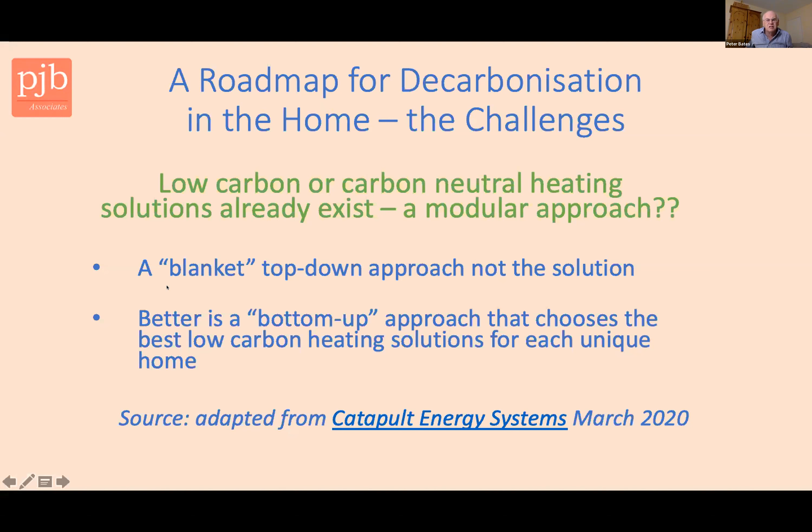Peter Bonfield, who was the CEO of the Building Research Establishment, said that in fact every home is unique, and that must be emphasised: there isn't necessarily one solution for every home.

Another thing to consider, at least what the Catapult Energy Systems considered in March 2020, is that 2/3 of homes are still suffering from damp, draught and overheating, and they are wasting energy. And something like half the population, and probably still not far off that, I would suspect, have no awareness of low carbon heating, or how to actually make homes carbon neutral.

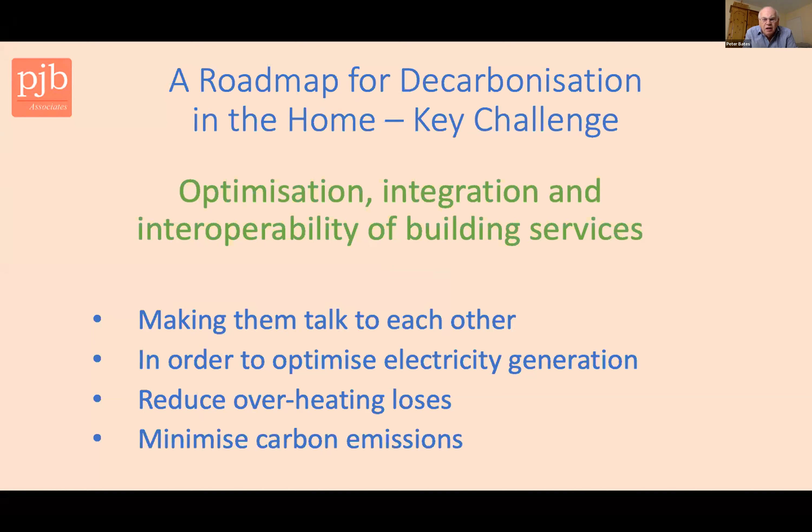So one of the key challenges, as I want to talk about today, is all about optimization, integration and interoperability of building services. Now, what I mean by building services is basically the boiler in the home, immersion heaters in the home, and anything that actually provides heat and hot water can be called services.

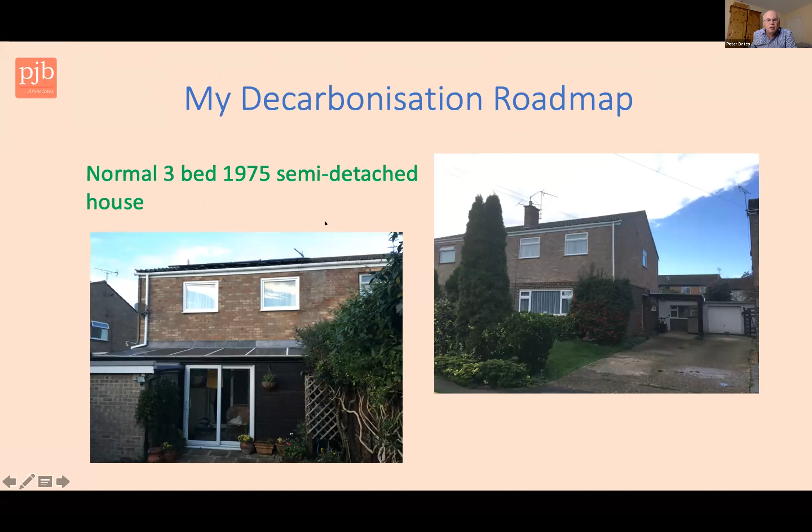So if we look at my own house and what is my decarbonisation roadmap: normal 3-bedroom, semi-detached house, built 1975. I've been in it for over 25 years. I've done probably as much as I can do in terms of taking the fabric first approach, in terms of loft insulation and cavity wall insulation. What I really need now, but it's not the purpose of today's event, is some nanotechnology which I can spray across my cavity wall, which will provide the perfect insulation. So I've done as much as I can anyway, although I'm still looking out for that as an innovative solution to emerge at some stage in the next few years.

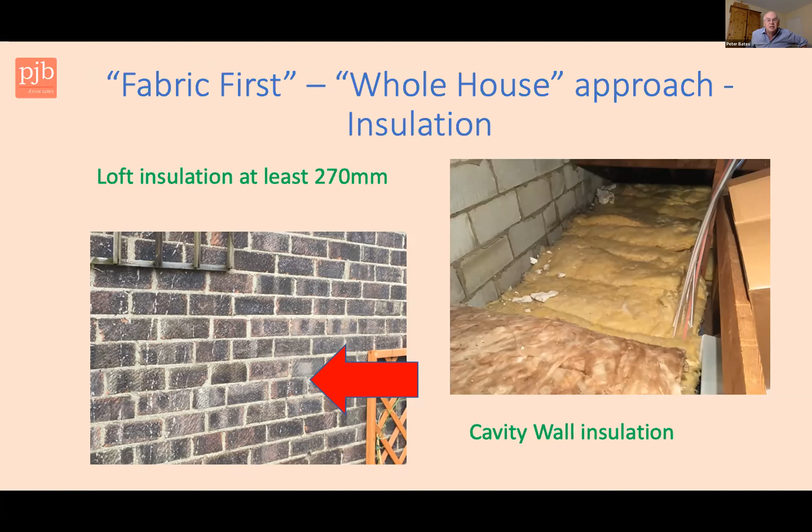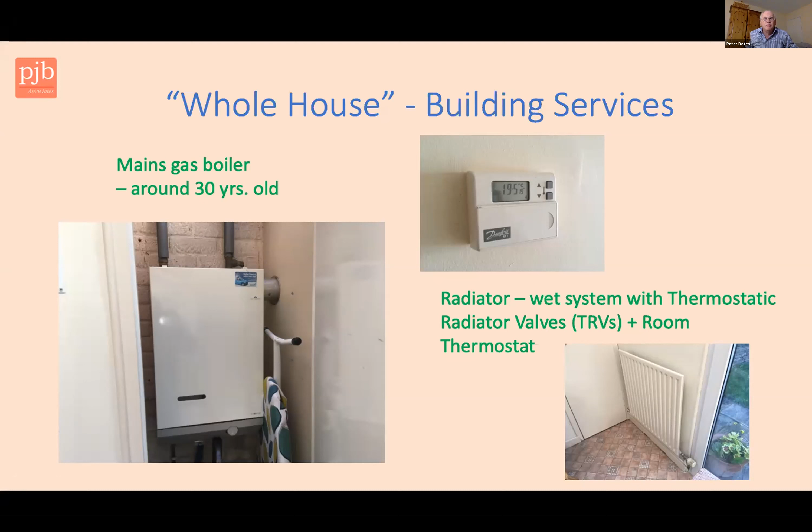What I had until recently was a 30-year-old mains gas boiler with the traditional thermostat and normal radiators. And I've gradually over the years been decarbonising my home, as you'll see. About 20 years ago, I installed solar thermal. I'll be honest, it wasn't a strategic plan 20 years ago. I probably got conned by the equivalent of the double glazing salesperson, and was encouraged to buy solar thermal.

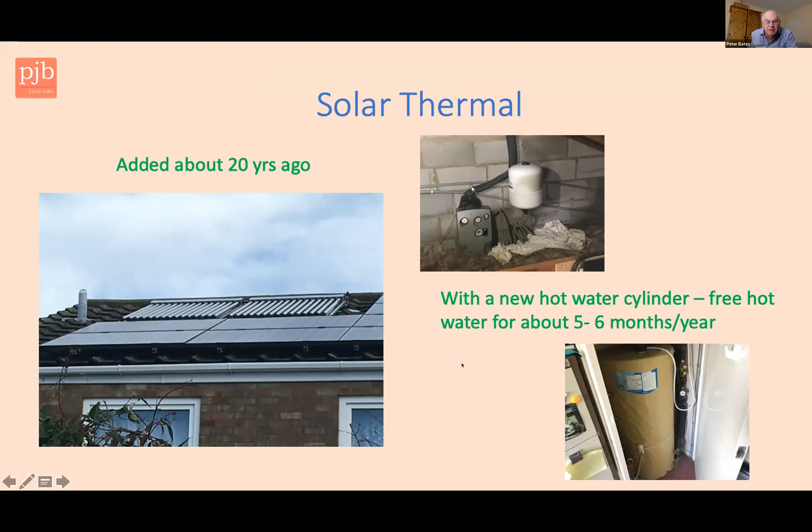Having said that, it actually provides me with basically free hot water for 5 to 6 months of the year. The expansion tank has been replaced, there's been a couple of services to it, but it's still going. And I've got probably 70, 80 degrees of hot water sitting in my tank, which I can't use because it's too much for me. I keep wanting to send it to my neighbour.

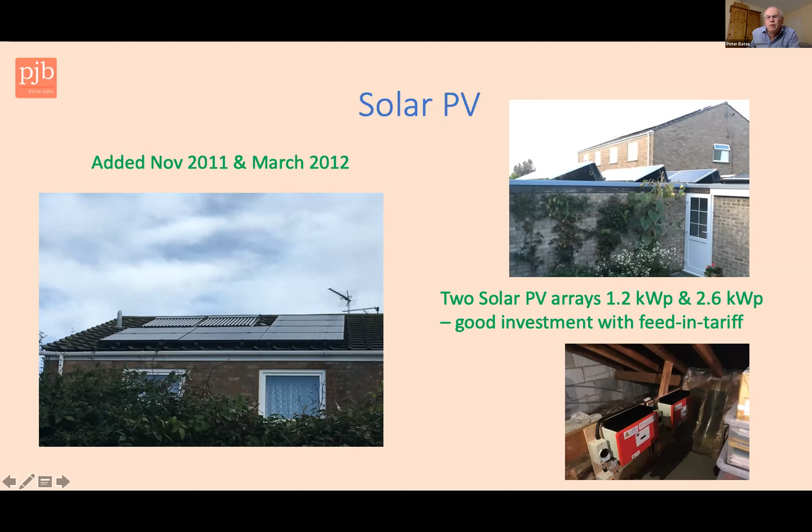In 2011, 2012, I took advantage of the feed-in tariff for solar PV, so installed that on the roof of my house and also on the flat roof of my garage as well. I was very aware that there is a potential for battery storage. So in 2019, I forked out just under £10,000 to put in a 15 kilowatt battery storage system.

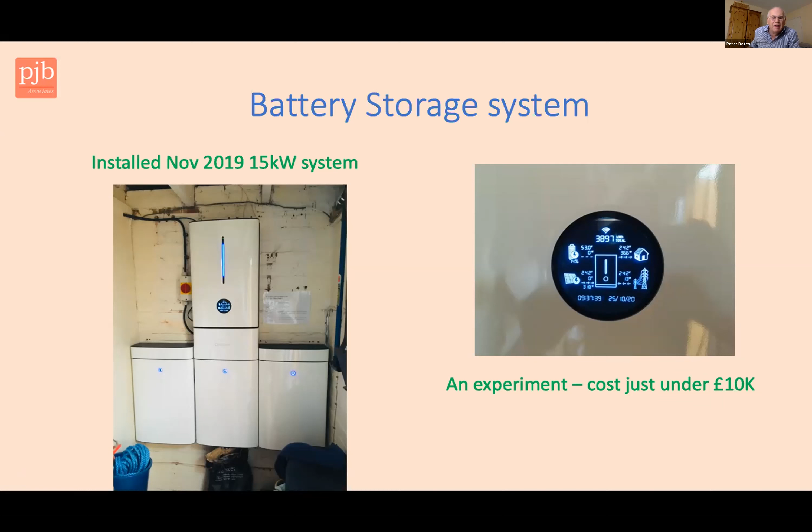It is an experiment. I wouldn't expect most people to put that in their own homes, but I thought I'd try it out and see what I could do with it, because I was particularly aware of tariffs like Octopus Energy's tariff, where there was the ability to buy electricity when it was cheap and then sell it back to the grid when it was expensive.

I remained until July last year on the Agile tariff that some of you would know about, but then, due to the costs of electricity, as most of us know, I've now gone back to the equivalent of an Economy 7, but in my case, my off-peak is between 8:30 and 1:30 in the evening and very early morning.

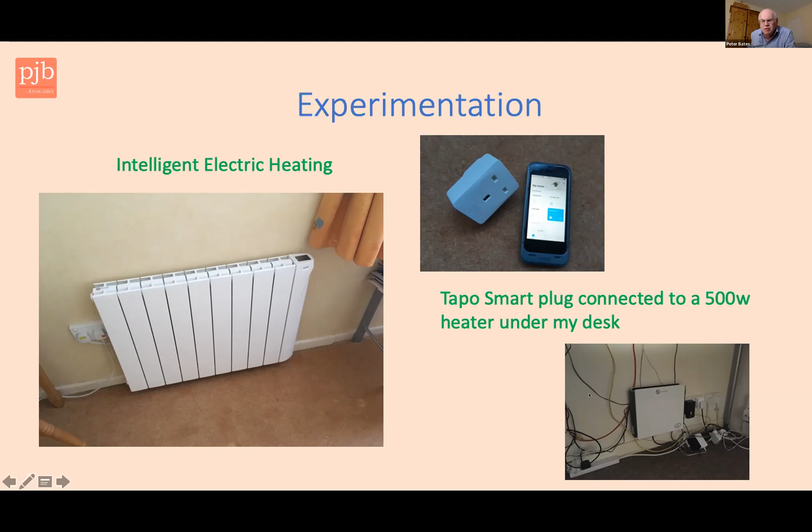I then experimented with intelligent electric heating. I also experimented with these smart plugs and found a nice, neat solution under my garage office where I could put a 500-watt heater and then set a timer using the Tapo smart plug. Most of those otherwise, by the way, just have to do with computers and printers.

I then heard about the PowerShaper project, which you're going to hear more about later this afternoon from the Carbon Co-op based in Manchester. And I said I wanted to have an electric charging point, so I decided to buy an electric car to make that possible. But to be fair, it was a 13-year-old ICE car, that's internal combustion engine car, and it was about to be renewed. So I chose the time, probably got it nicely right, to buy an electric vehicle.

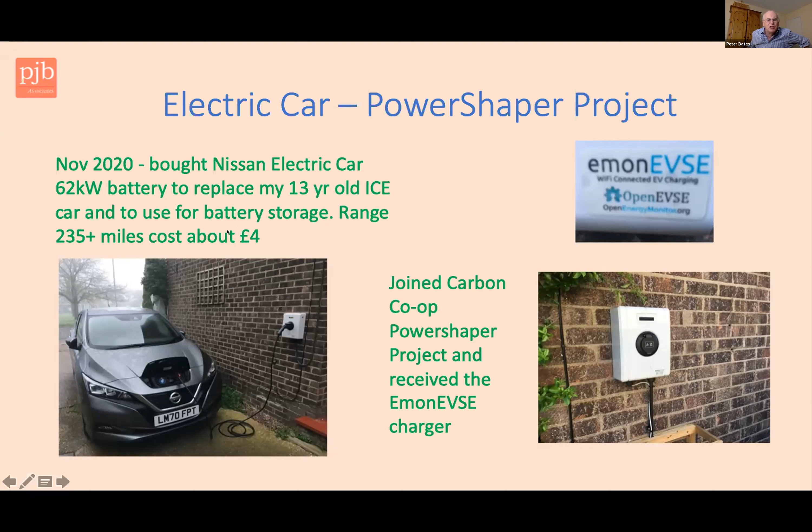Comparing the cost of an electric vehicle to an ICE vehicle - when we're talking about quotes of £100 to fill up the tank, well I get something like 235 plus miles on that mileage, and that actually costs me about £4.

But then I had the opportunity to get a Wallbox Quasar. It was given to me by Wallbox as part of a beta field testing trial, which I could use my Nissan Leaf for. So I've got the ability with this charger - it's bi-directional. I can charge back to the home, I can charge back to the grid, as well as charging from the grid back to the car.

That is probably fairly unique. It was probably 2 or 3 years away that this type of technology would start to take off. And it won't use the system of CHAdeMO, which is one method of charging a car - it will use the CCS method. I can't remember what the acronym is for CCS, but I'm sure somebody will come back to me on that one.

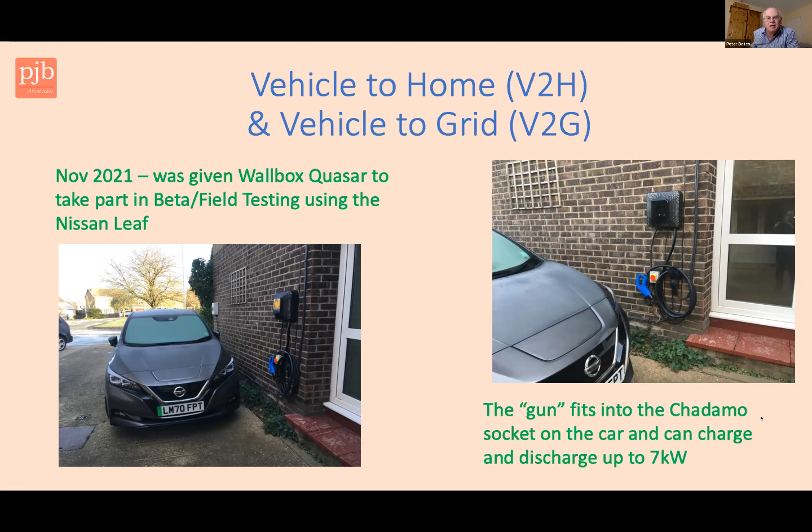Then in January this year I had the opportunity to take part in the Energy Systems Catapult, a government-funded organisation, and take part in their Living Lab. I had the opportunity to get some smart TRVs, which are the thermostats that sit on radiators. Normally you can only manually control these, but these all work automatically with an app.

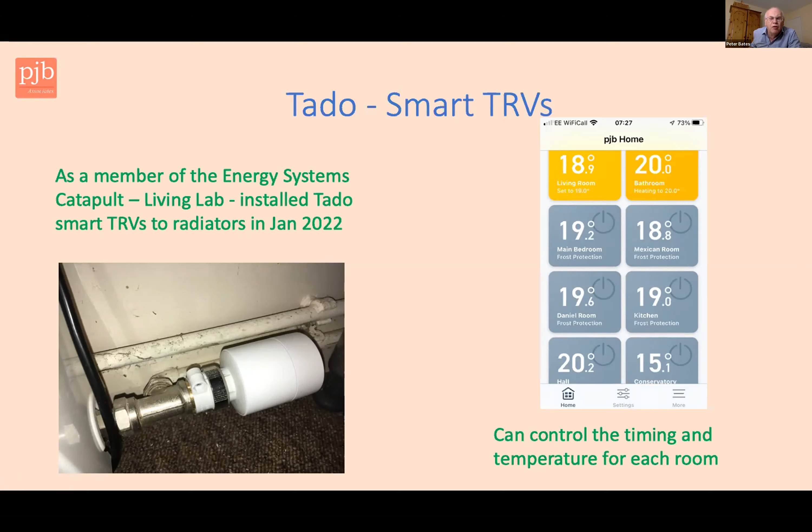So I'm moving a bit further along, getting much more control over my own heating system. I also took the opportunity in April this year to add a third solar PV array, because I discovered that the inverter on this battery storage system is actually a hybrid inverter, and I have the ability to transfer the electricity generated via DC, direct current, into the battery. The way it was originally set up on my other two solar PV arrays was by what I believe is known as AC coupling.

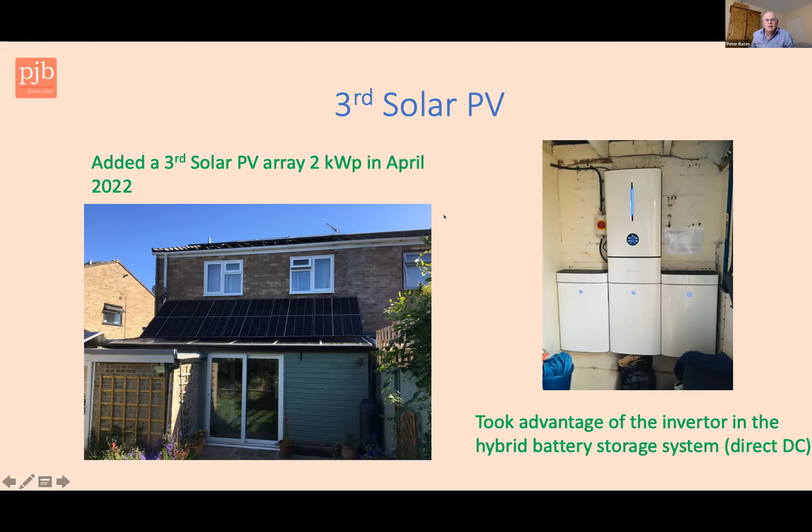And again, I finally managed in April this year to remove my 30-year-old boiler, which was sitting here, and I've decided to replace it with an electric storage boiler, which unfortunately, because it was installed at the end of the heating season, I've not been able to fully test it out yet. But I was able to get off gas, get the gas meter removed and capped, and only utilise, well hopefully only utilise, off-peak electricity to do this.

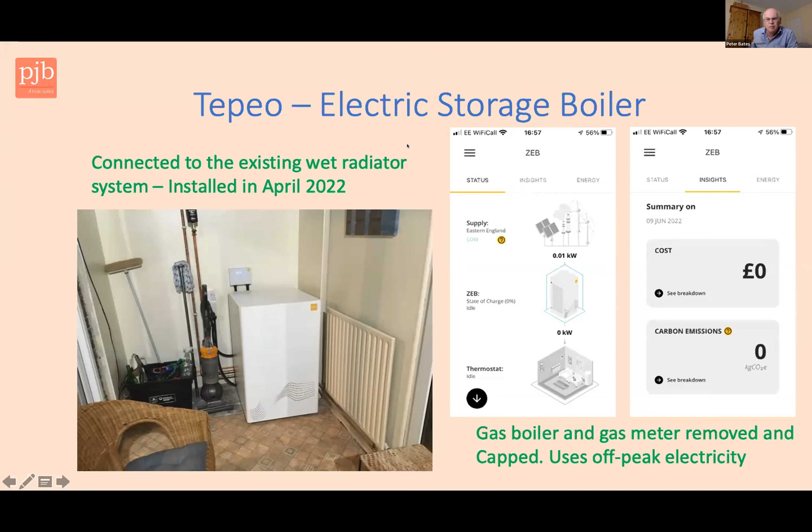So I've got to the point where I've now decarbonised my home. If you think of just removing all the devices, it's all about decarbonising the home.

My next stage, and this is the whole purpose of today's event, is to look at how I can optimise it, integrate it, and also make them interoperable - those various building services which I have - in order so that they will talk together. I'll be able to optimise electricity generation, reduce overheating loss, and minimise my carbon emissions.

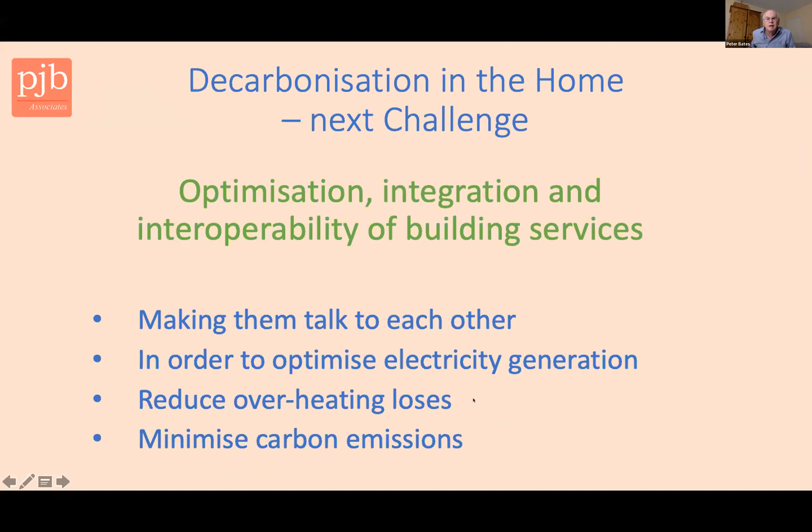So what do I need? Well, this is what I need. One problem I've actually got currently, or at least did until recently, is that the metering system for my solar PV and my battery storage system was only capable of dealing with the first two solar PV arrays. I had to have those disconnected, and then when I had the new solar PV array installed, it wasn't telling me my overall export from there.

But we recently solved that one with an open source solution with the help of Matt, who's our last speaker today. But there are all sorts of other issues which emerge there. So although I'm an early adopter, I think we're now getting to the stage where we need to look at some of these issues of how to make them work together. Quite often early adopters would buy a bit of this and a bit of that. Now I fully admit that most people, when they finally get to the point of decarbonising their own home and possibly removing their oil or mains gas boiler, there'll be much more integrated systems available for people at that time. But we're not there yet, and that's what I want to be talking about today.

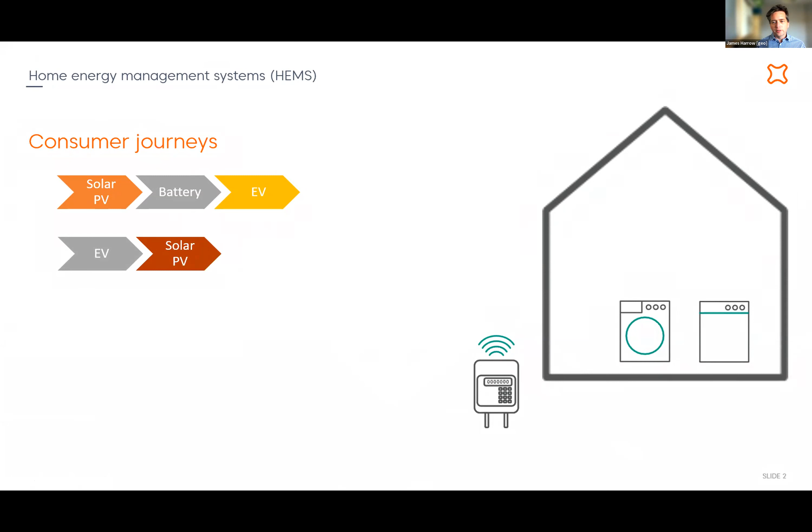That's because at GEO I was leading the core for grid demand side response and home energy management systems. I was lucky enough to be able to integrate our solution together with my own battery, a different one from the one we used on our trial. I'm going to talk to you today about when you really need a home energy management system and why you should have one.

At the moment, if you've got solar and battery, those two things can work pretty well standalone. Battery inverters are designed to have a current transformer that detects how much export you'd be sending to the grid. It just clips around your mains connection into your home, and that automatically charges. When the sun goes down, it will automatically discharge to power your appliances.

But if you've also got an EV, solar and EV chargers do exist today and they work pretty well. It's a similar setup where the EV charger stops you consuming power from the grid and only consumes from your solar panels. As you start to add more on this decarbonisation journey, my next purchase is likely to be a heat pump.

So I'm going to struggle to work out how to control all of those things and reduce my import from the grid, and also make sure my washing machine and other white goods appliances can be controlled in a similar way. It's really important to talk about early adopters and mass market, because there are systems out there today, and as Peter mentioned, he's starting to find the bits of kit don't work together. They were never designed to work together, and that's what we need to address for the mass market.

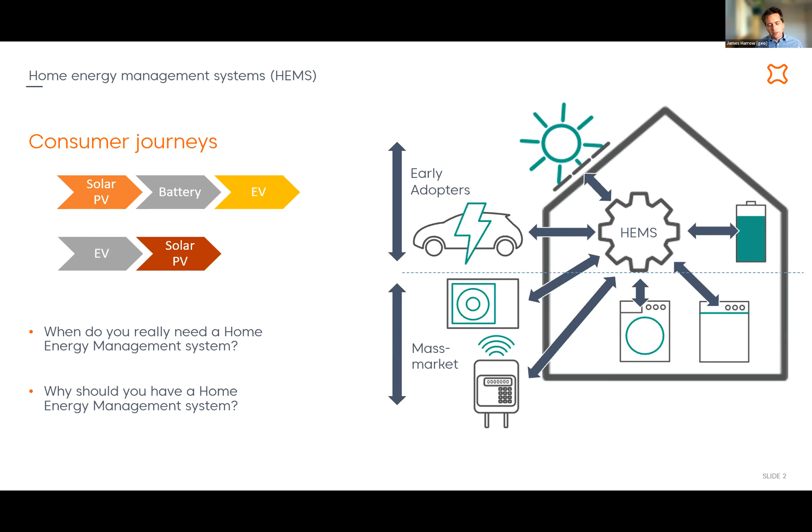So let's talk about the optimizations you'd want from a home energy management system. The dream is that you as a consumer don't have to do anything - you just set the system up and it does everything for you. On our corporate grid trial, we built a solution that would do exactly that.

For example, you want to look at the cheapest times of day, so knowing when the tariffs are going to be cheaper, but also taking into account things like the grid carbon intensity - the more power stations we need that are burning fossil fuels to power the grid, the more CO2 is produced by the population across the whole country.

If you're lucky enough to have solar PV, you've probably got a different optimization. You want to decide where your solar goes - do I put it into my battery, my heat pump, or my EV? Maybe you can do some of them simultaneously. It's really when you get more than two or three energy smart appliances that you need something to take care of that for you.

And I certainly today manually have to work out when to put my EV on charging. I have to go down to the EV and reduce the charging rate, because my particular EV charging system doesn't yet have the capability to limit the charge rate for the amount of export.

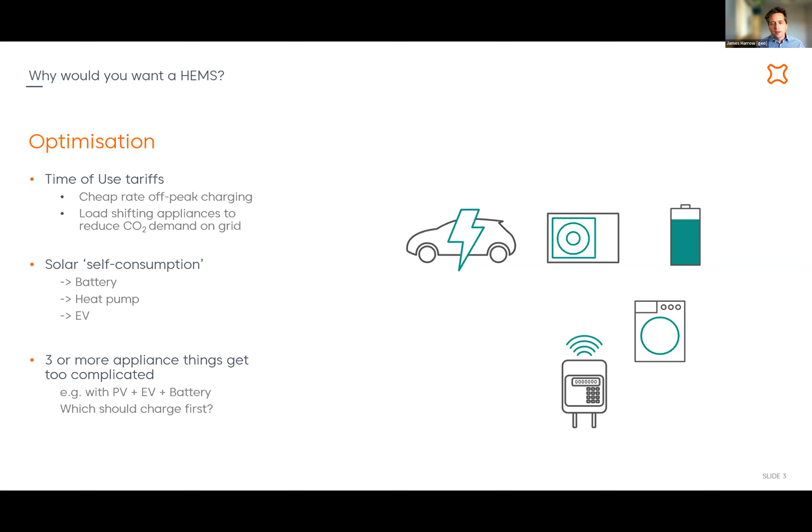So there are challenges. If you've got solar, that's great - you can work out where you put the energy during the day. Once the sun goes down, you probably want to make sure you're powering things in the home, and you may pull some power off the grid. But at night you probably want to charge your EV. There's a general principle here: we try not to first charge one battery and then discharge it into another battery, because you lose about 20% efficiency in the round trip of going in and out of the battery.

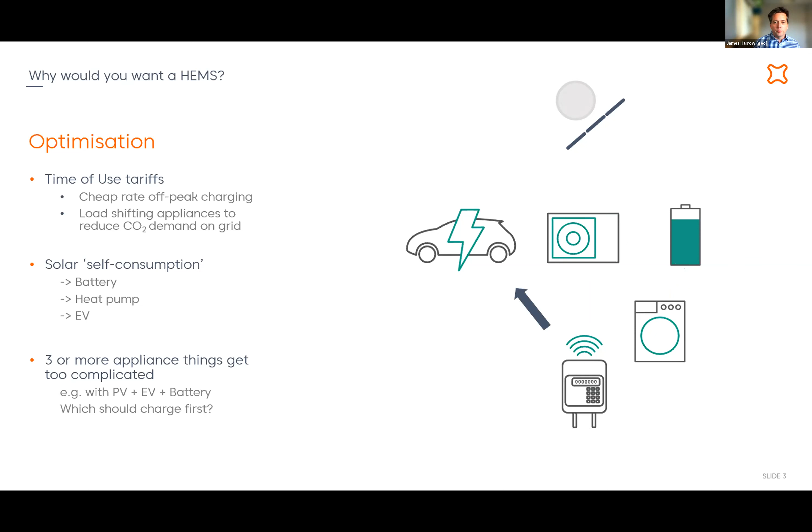So it's always better to charge your EV directly off the mains if you can, rather than taking the power out of your home battery.

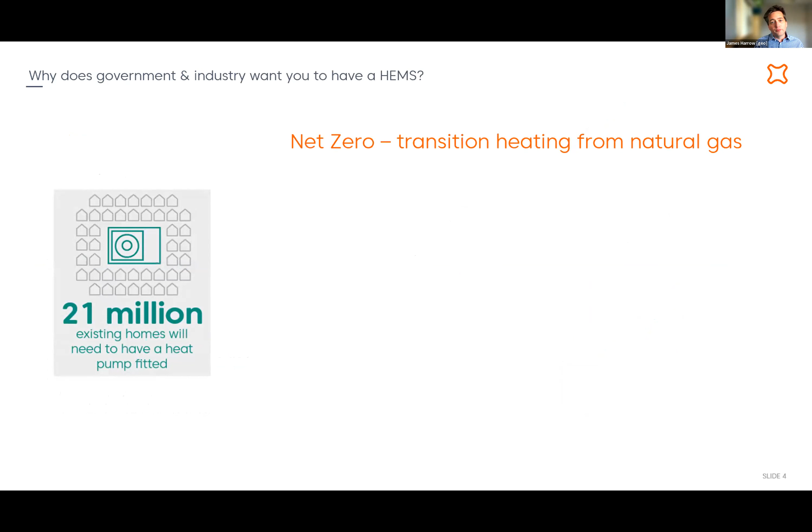But there's another reason you really need to look at why government wants you to have an energy management system. In last year's Climate Change Committee budget, they said that out of the 27-28 million homes in the UK today, by 2050, 21 million of those will need to have a heat pump fitted. The government has already started announcing plans to get us to 600,000 heat pumps installed every year by 2028.

We've done a white paper with Valent on heat pumps and the impact on the low voltage network. So what do we mean by low voltage? We mean the 230 volts that feed your house. There are transformers and substations you'll see around your houses, villages and towns, and cables that feed that electricity into your house.

We did some calculations which show that if somewhere between 10 and 20% of homes converted from gas to electric heating and cooking, as a consequence of getting rid of your gas meter, that's probably going to start causing issues on the local grid.

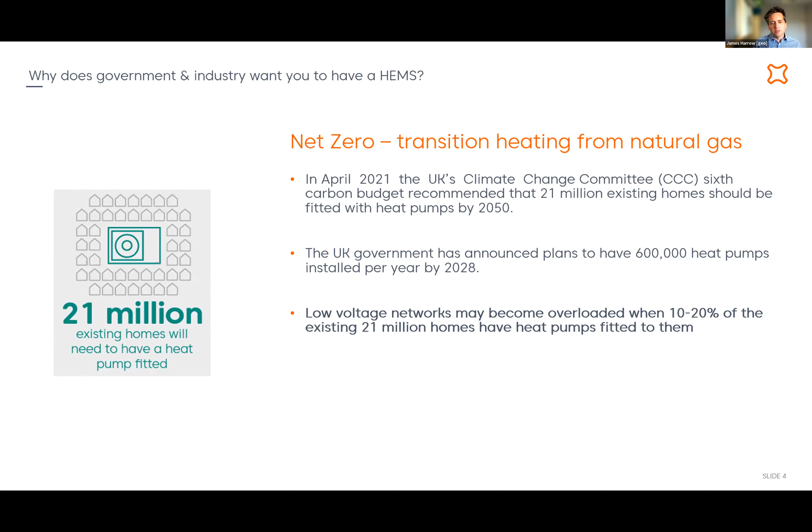So we need to be really careful about when we charge our vehicles and when we use heat pumps, in order to avoid power cuts and issues on the local grid.

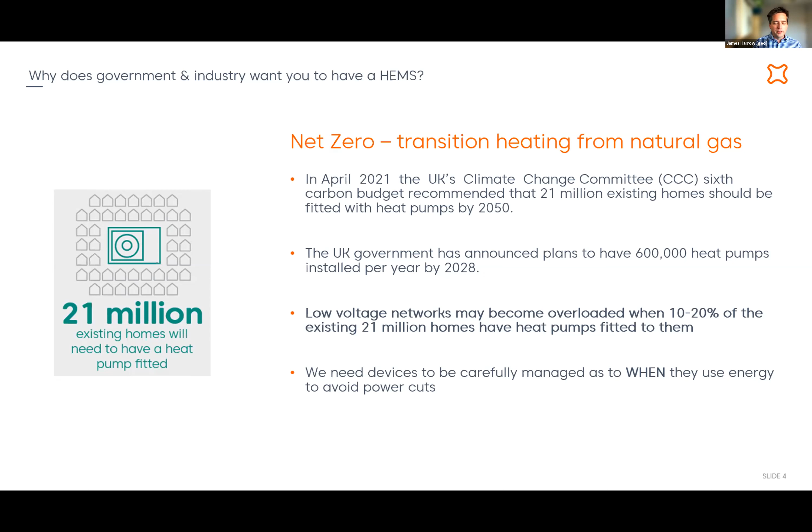So there's a whole technology sector growing called demand-side response, which is already there for industrial and commercial applications. We've looked at the modeling for the peak times of the day.

Between 4 till 8 p.m. is when everyone comes home, they start cooking, they put the lights on. You've probably still got some shops and offices open where they're also using power as well. So the peak on the grid is at that point.

Now with EV charging, if you get a new EV charger this year, it will actually by default not let you charge during those peak time periods, and it will encourage you to shift to overnight charging.

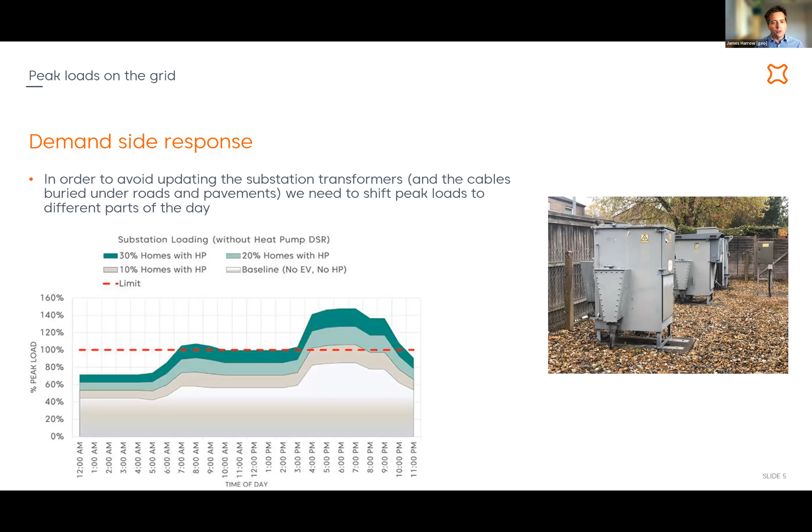But with heat pumps etc., we can't really turn off heat pumps during that time. So we need something to control the heat pumps and also the other white goods appliances in your home.

As it stands today, there are lots of existing and possibly open standards that are there. But the solutions you buy today, you may find that you actually get locked into a particular vendor or a particular group of companies where their equipment works together.

You can imagine if today you bought a Tesla Powerwall and a Tesla EV, you'll get a really good experience. But if you decide to move away from Tesla and buy a Jaguar I-Pace or some other EV, that wouldn't necessarily be compatible with the Tesla Powerwall, and you wouldn't get the same great experience.

There are lots of trial systems out there today, and Peter's talked about some of the ones he's already on. Geo's done a government-funded trial a couple of years ago on how to build a home energy management system, but it's not yet really a mass market.

As Peter mentioned, the CHAdeMO charging standard, which allows vehicle to grid, is not readily available in the newer European standard for CCS. And again, I can't remember what CCS stands for either.

But there are some standards coming along. There's a great one called EEBUS that's being adopted by German manufacturers. That is really a whole home energy management system, with lots of protocols that operate inside the house to do that sort of thing.

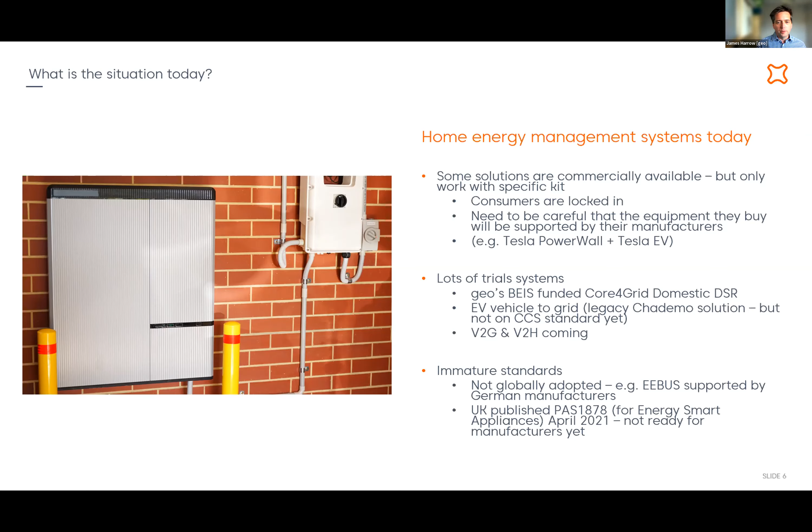So where are we now? I guess the key takeaway is we're not quite there yet, but there are really some compelling reasons for having a home energy management system. As Peter's already outlined, the early adopters want to optimize their PV generation, reduce their energy bills and reduce their CO2 impact.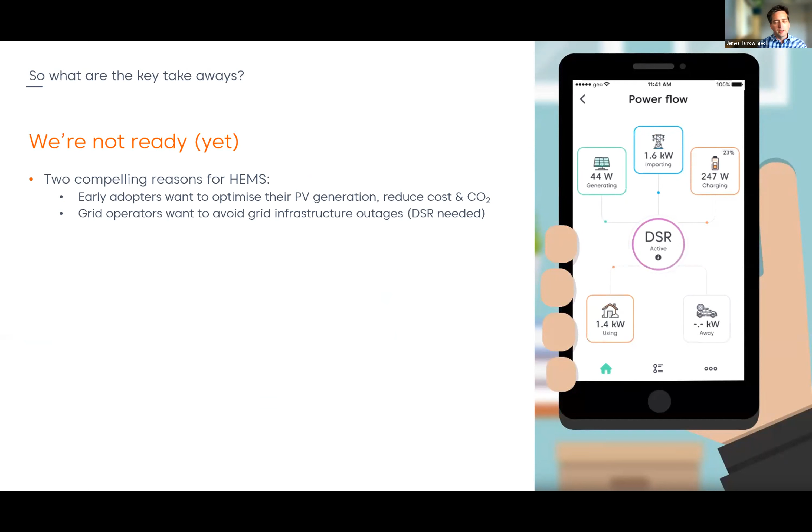And grid operators really want to avoid having to dig up the roads and replace all those substations around our homes. And also there's a national grid impact as well as that. So this is where we need the demand side response. We have not really got the interoperable HEMS and ESAs.

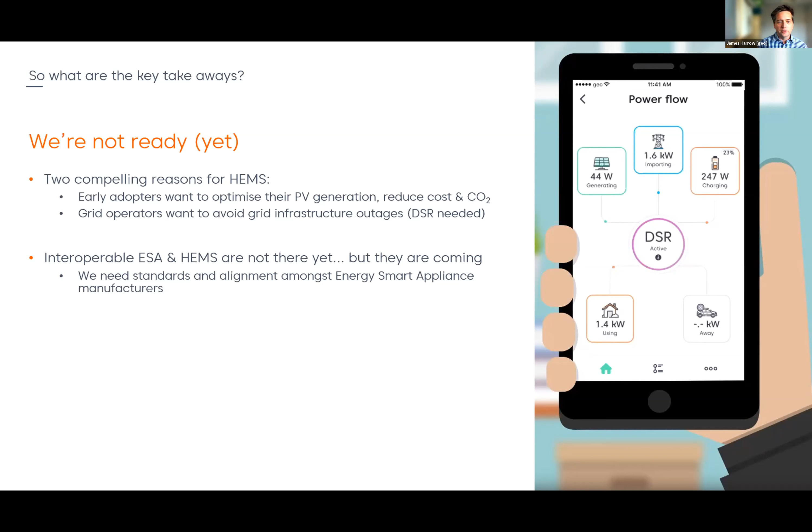So the HEMS being the home energy management system and the ESA being the energy smart appliances, but they are coming. But we do need standards and we need alignment amongst the manufacturers of those before the HEMS home energy management system vendors can actually build those products and make them mass market. So you can, as I say, get solutions today. You may not find a single vendor that supports all of your individual devices that you've got.

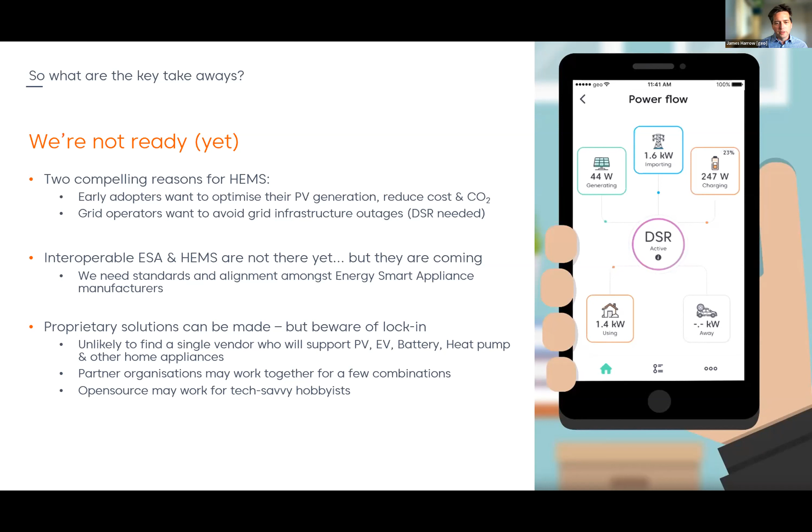You're more likely to have to work with open source, and actually if you're technical enough, you can probably build your own system together. But again, that's not really a mass market solution. Partner organizations may well work together. You might have a heat pump vendor working with an energy provider that controls your heat pump, but you might not find your energy provider works with your particular EV charger. So those partnership organizations need to be built as well.

But I think there is a very bright future, but again, it's all about putting the consumer first for mass market. So we need to look out for a new standard that's coming out this year. There is quite an exciting development going on. You may have heard about it, you may have read about it in the press, but there's something called Matter.

It is being developed by Amazon, Google, Samsung, and Apple as the four big digital giants that you'll probably have heard of, but there are hundreds of other companies involved in this, and that's across Asia, Europe, and the Americas as well. And we're expecting to see those first products launch this autumn. So that will have things like smart thermostats, smart light bulbs, media, hi-fi, automatic window blinds. All those sorts of products are part of that first tranche of delivery in this autumn.

But energy management is clearly on the roadmap, and there's lots of discussions going on. And we'd expect to see the first products maybe coming out next year on that. But I think going back to the government's desire to try and get to mass market, they need consumers to be able to adopt these products so that they can do that peak load control to avoid those overloads on the local grid.

And consumers need to have a trust mark, some sort of way of knowing that they can actually buy products that will work together. I keep talking about HD ready TVs 20 years ago, and I think it's probably time now we start having an industry consortium of something like DSR ready or Wi-Fi ready or USB, all those sorts of things that people as consumers can buy into and know about.

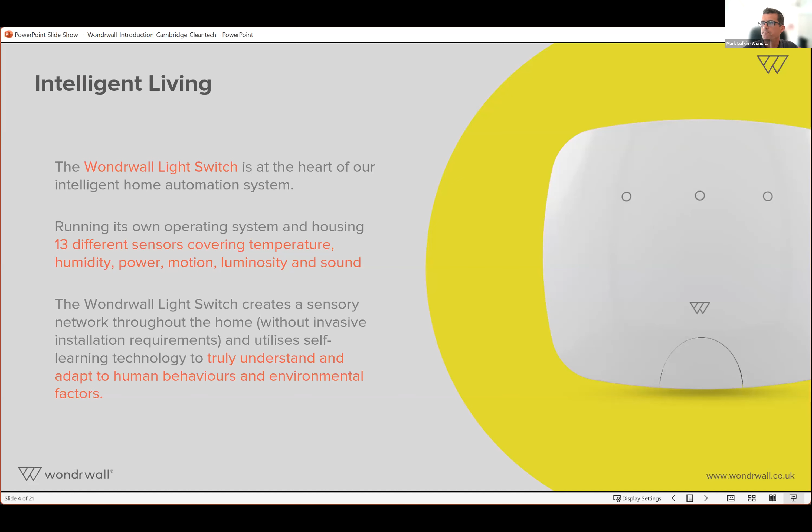So to give you a better idea of that, one of our homes will gather roughly 20,000 data points per day per home. So that's about 6 to 7 million data points per year from a single house. That data then feeds into our AI. That data is important for 2 reasons. One of them is artificial intelligence gets more intelligent the more data you can give it. So the more information it has, the better it functions. So this data set is what allows our AI to outperform anything else in the market.

The second point is, as we implement these solutions into homes, we want to be able to monitor whether they're actually performing as expected or not. So that concept of post-occupancy monitoring is built in as standard. We already have that data built into the system. It's not an afterthought.

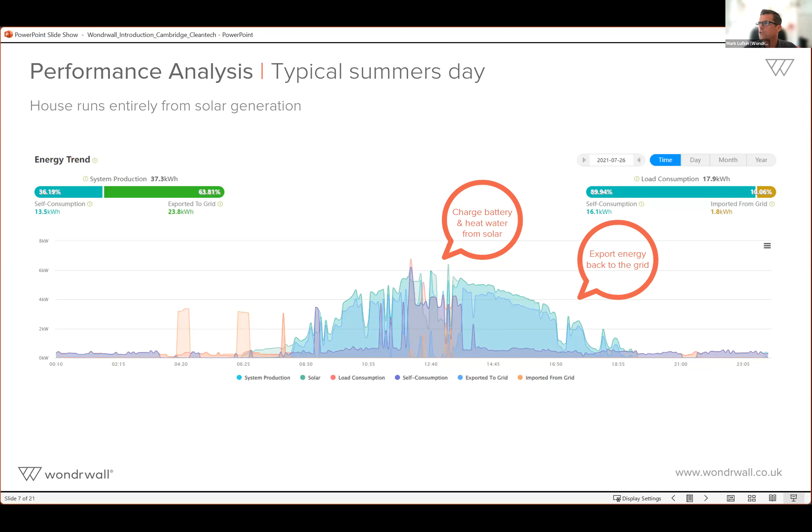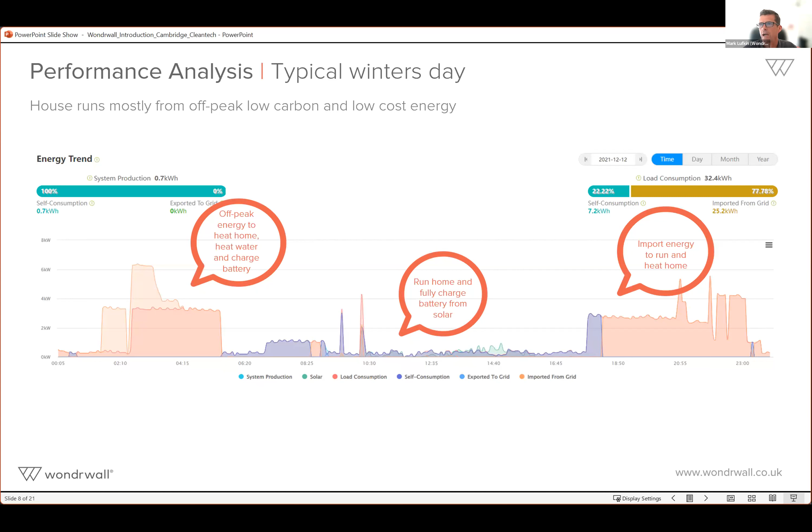But with battery prices coming down, that won't be a factor into the future. In terms of the heating solution, the way we do it is the system zones the heating. So we learn temperature preferences for each room, when that room is occupied and when it's empty, and how quickly that room heats up and cools down.

In doing so, if you think about it, even when you're home, you're typically not using more than 1 or 2 rooms in your home. We can significantly reduce the energy consumption, by up to 70% versus a traditional home, by using this occupancy method of control of the heating within the home. We use ceiling mounted infrared panels, typically speaking, for this.

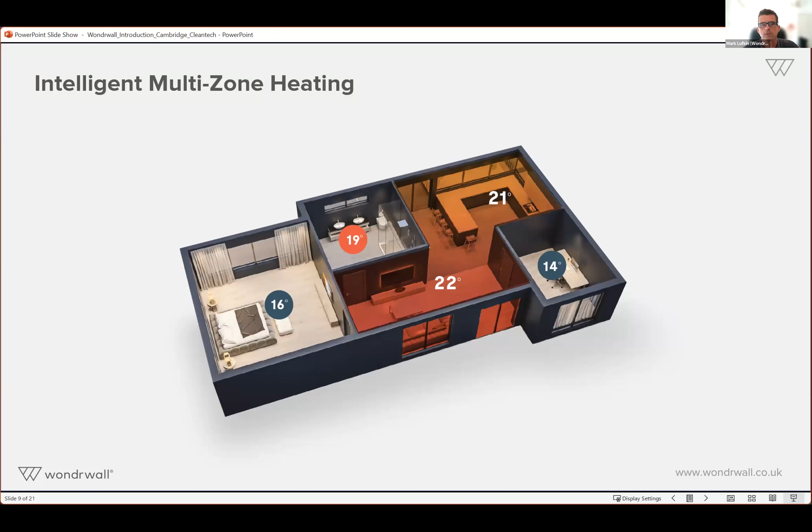They're easy to install, relatively low cost, they're zero maintenance, and most important from our point of view is they're very responsive. So if the AI gets the prediction wrong and detects that somebody's in a room unexpectedly, we can get that room up to temperature very quickly using the infrared panels, whereas it's not possible with a slower heating system, underfloor heating, for example.

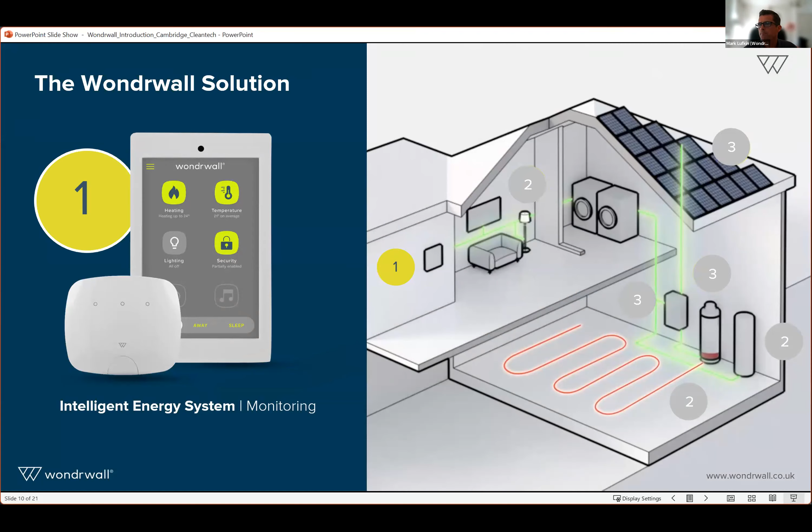The solution is built up into multiple pieces. So from a retrofit point of view, we would initially build in a monitoring and basic management solution. So whole house heating controls, don't heat the home when it's empty, but also with that ability to monitor the performance of the home and push out messages to it. This integrates into a landlord dashboard, which allows the monitoring of all of the housing stock.

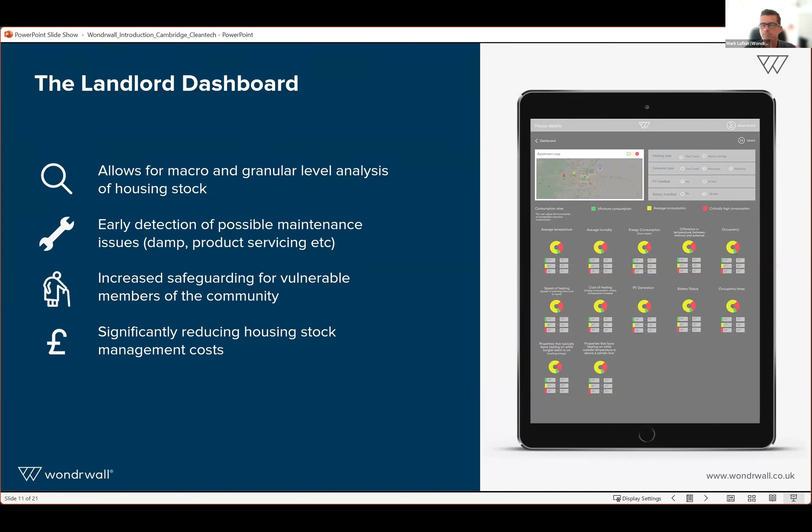So we're talking social housing. We can monitor all of those houses, both in terms of the performance of the homes, but also build in notifications for maintenance issues, damp, for example, or for safeguarding of vulnerable people, identification of fuel poverty. On that platform, we can build the other pieces.

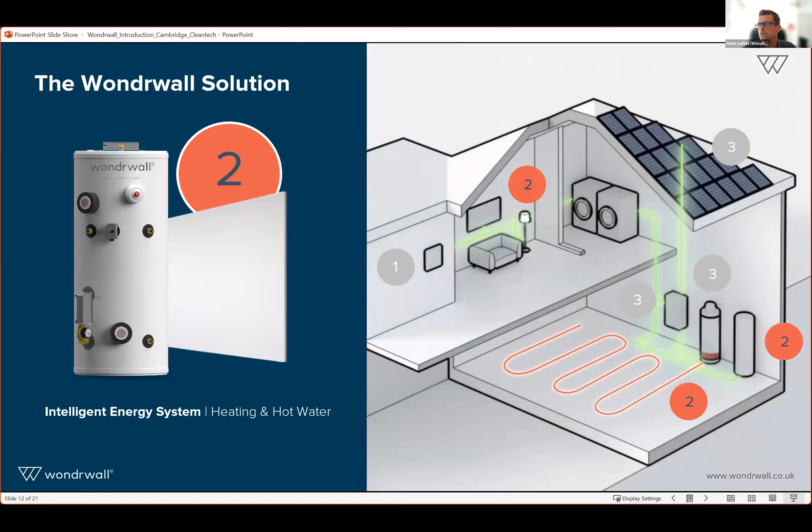So the heating and hot water system, infrared panels, or it could be underfloor heating, or any other sort of heating for that matter, and the hot water system, and the solar PV and energy. They are modular, so you can put them either all together or different pieces can be used individually. Put all of them together, you get our net zero solution for a full net zero performance capability out of the home.

In terms of a little bit of data, the slides will be shared afterwards, I believe, so you can go and reference this, and I have a few additional ones. But just looking at the infrared heating on its own, this is independent data from SRE, from an actual home. The infrared outperforms gas and air source from an energy consumption and CO2 point of view in the particular house that we looked at in this case.

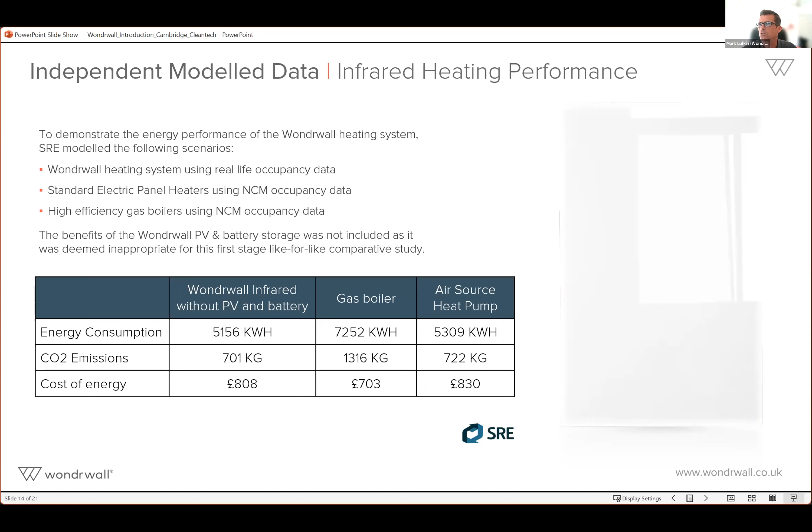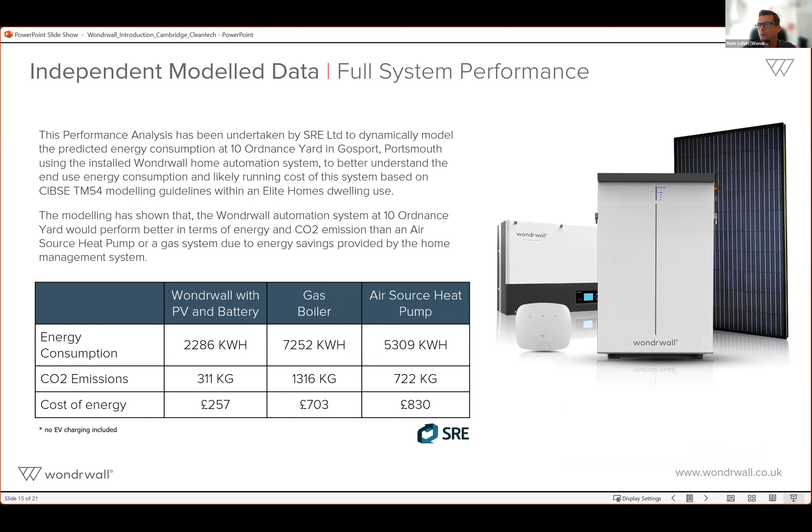And it's lower cost than the heat pump, although not as low cost as a gas boiler, given the lower cost of gas versus electricity. When you integrate in the full HEMS system with the solar, the battery, and everything else, the performance is significantly better. Obviously, no solar with gas or heat pumps in these cases. You could add them, but the Wondrwall solution on its own is roughly the same as putting an air source heat pump in without the solar. So you get better performance for the same price.

Just a couple of other last little things. This is actual data out of the home. One of my points around homes is by using these sorts of systems and looking at what you're doing, heating becomes less of a factor. So in this particular home, it wasn't a passive house standard of home. It was decent fabric, but not super fabric. Heating was less than 20% of the energy consumption of the home through the total year.

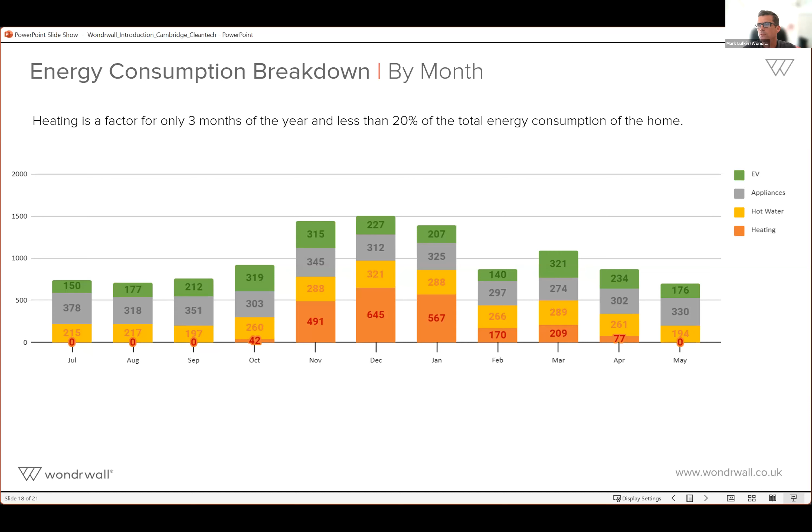So it becomes important to look at other factors like hot water, like the appliances, and of course the EV as you manage these homes and look to reduce costs and decarbonize them. And then from an annual basis, I thought Peter was going to talk about his Ripple Energy wind integration, so I was going to make a comment about it, but what you can see here is the solar is generating half of the energy required for 70% of the year, about 8 months of the year, roughly.

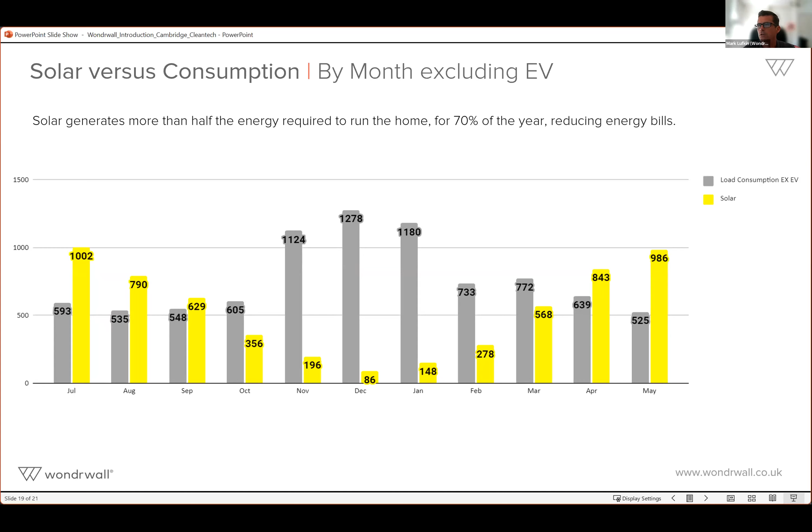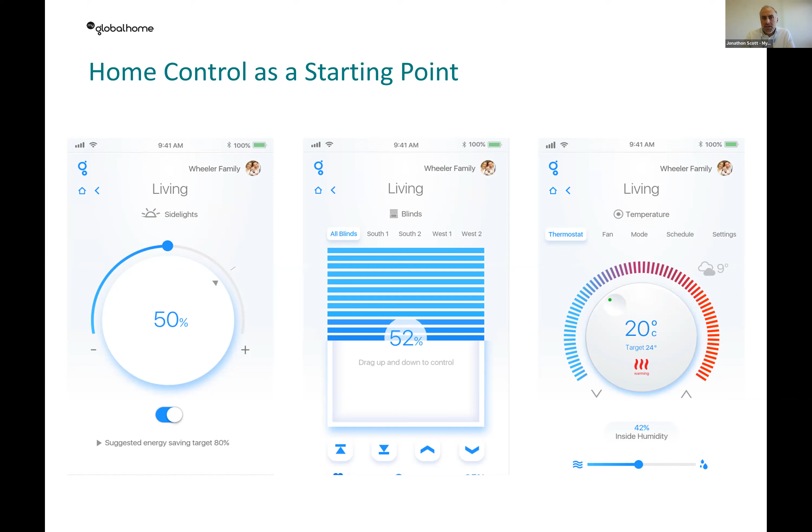We believe that it's about bringing together all of the functions, and about using the application of software, as Mark has highlighted with the software that he's got, to represent that data to be useful to the homeowner. So it isn't just about turning the lights on and off in various rooms or the heating up and down. It's about having systems that understand where people are within the home, how their consumption and use of the home is adapting over time, and how the behavior can then influence the use of things like energy within the home.

So we're taking that holistic approach to the overall smart home application, and we're taking a slightly different approach again in the fact that we're putting in edge devices. By that we mean we are effectively putting a server into the home, which then controls the main processing, and is not so reliant on the internet for base functionality of the home. So if you want to turn your lights on and off, the server makes that decision rather than having to use the internet for it.

Obviously data can be uploaded to the cloud as and when required, but it doesn't have to be constant. It can be done periodically. By approaching it this way, we believe it allows for significant expansion of the software capabilities of the home and a greater ability to integrate with a wider pool of appliances and manufactured products in the marketplace. So how are we looking to provide that base control of the home? What we've chosen to do is partner with a number of established businesses.

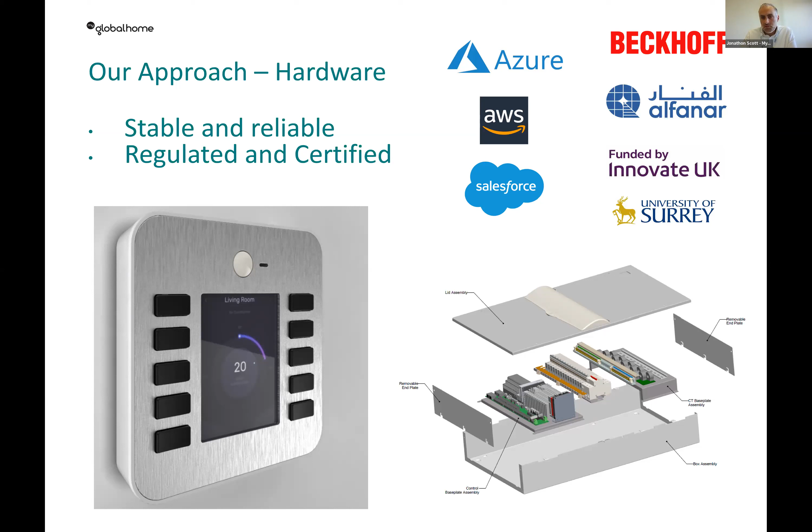So on the screen at the moment, you have an example of a light switch and also a 3D render of a distribution board. So an app that can help to control your home. You can also choose to control your home via the devices that are around the property. So by that, I mean the thermostats and the light switches.

It means that from day one, anybody moving into a home or living in a home with a system like ours could control the home just by going and turning the light switch on and off as you would do normally, or turning the thermostat up and down. But if they choose to, they can interact further with the property by downloading an application and then controlling and interacting with the home in a different way.

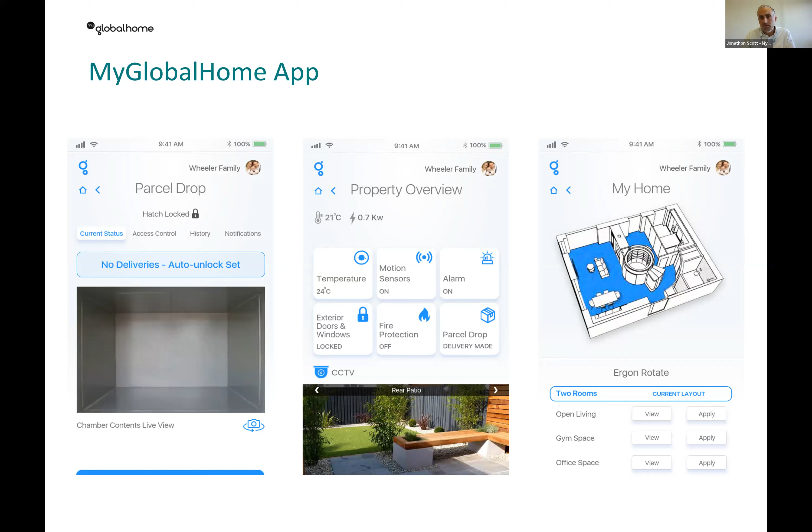But we think equally of importance is to look at things like the maintenance aspect of a home. How can your home be better maintained if you've got a system that understands the asset register of everything that's within the home and can tell you when things might be looking to fail? Healthcare, again, mounting sensors around the property as we also do to collect numerous amounts of data points. It can help to be a good indicator and a pathway that can aid with the application of in-home healthcare.

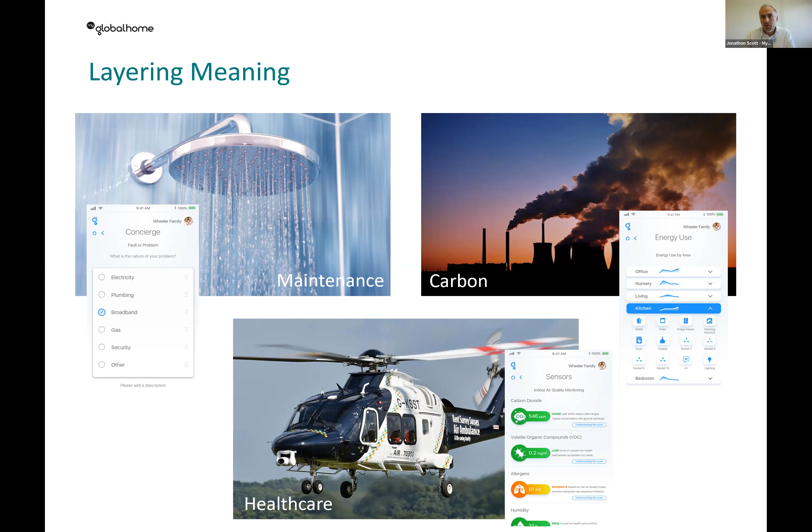So to move on to energy management and home energy management systems, our distribution boards have current transformers mounted within them. That means that every incoming way into the home is monitored to see the level of electricity that's being consumed. That can then be visualized through the application so that people can actually see the level of use of their home through the different zones.

And that then feeds into the very capable and powerful Beckhoff control system that can process significant amounts of data to then enable the home to learn and adapt to the needs of the occupants over time.

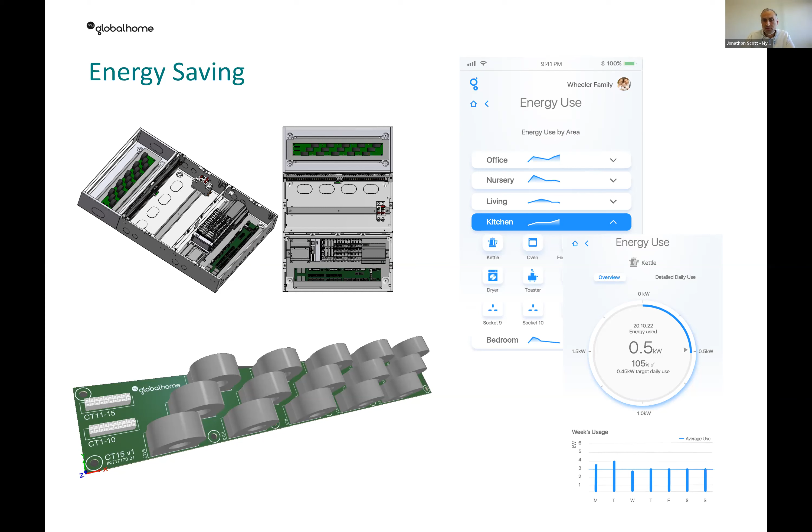So base control of the home that will enable intelligent living and also the ability to understand and see the control of energy used within the home, and open for integration with other third parties. We are not at the retrofit stage yet, so that's my parting comment. We're not ready for retrofit, but we are developing our retrofit model for 2023 in conjunction with all of our partners.

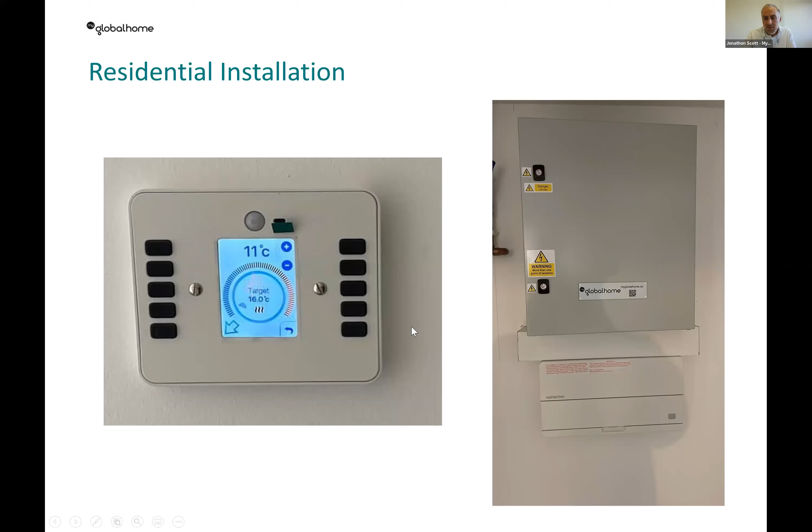So that's my final slide, and I will take that opportunity to pass on to Matt from the Carbon Co-op.

No, it's actually Irene. Ah, Irene. I'm very sorry. It's fine. And I think everybody can hear me. Yeah, we can hear you well.

So I'm going to share my screen. Okay, hopefully everybody can see the screen. Thank you for having me this afternoon, and everything that I've heard so far is very relevant and very interesting to what AmpX is doing.

I lead AmpX, which is a digital energy platform player, UK-based, fully owned subsidiary of a company called AMP, which is a renewable energy infrastructure developer, owner and operator, headquartered in Canada, but with a global footprint. Today, with about 7 gigawatts of energy either on the ground or about to be on the ground.

So I'm going to be speaking to you today about one of our products. But before I do that, I think it's fair to give you some context as to what AmpX has been focusing on. We're a digital energy platform player that has been working on a number of interoperable products that are all aimed at the edge of the grid.

For us, the focus is the edge of the grid because, due to the increase in decentralization, it is clearly the locus of the greatest challenges for a number of stakeholders - system operators, network operators amongst the ones mostly impacted. And for us it's the locus of opportunities, because addressing those challenges with a whole system approach, which is what we have been taking, in our view, will unlock a number of new business models, opportunities, additional revenue streams for different stakeholders.

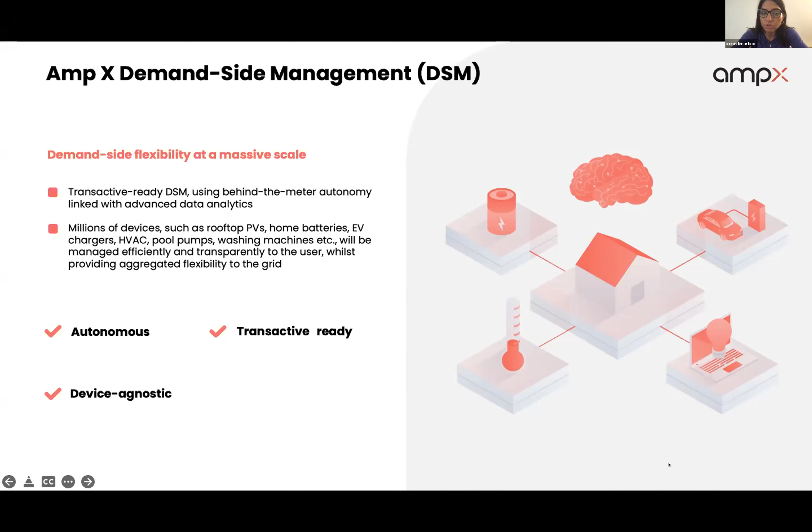To us at AmpX, the biggest hurdle to unlocking behind-the-meter flex is the relationship with the user. It is how we have not only a home energy management system which is holistic—and some of my colleagues have already presented some of the solutions—but it needs to be very user-centric. Otherwise, it will simply not work with users to entrust it.

So AmpX has developed a platform that aims to be agnostic to different HEMS, specific appliances and devices, but also aims to be very transversal and holistic. Of course, there needs to be integration of big loads, meaningful loads like EVs and residential batteries, but we're also seeing appliances to be accretive—small but meaningful—when it comes to having a solution that is seamless and provides a single interface for the user to deal with everything which is energy consuming or energy producing in their premises.

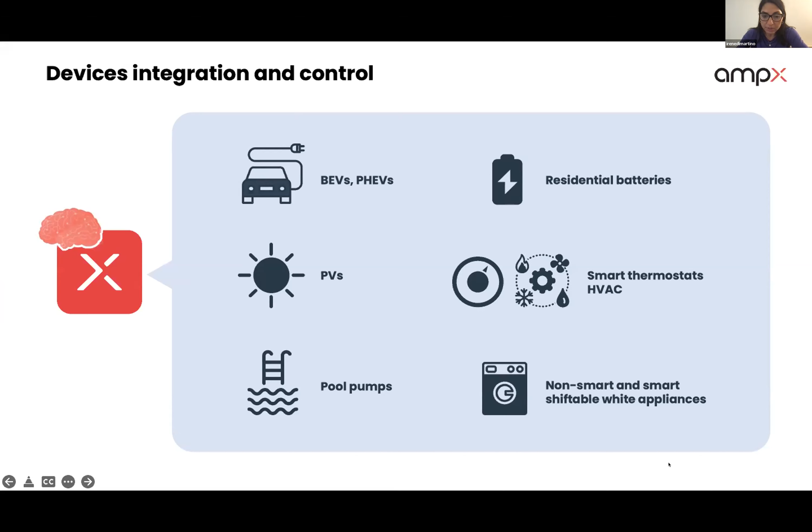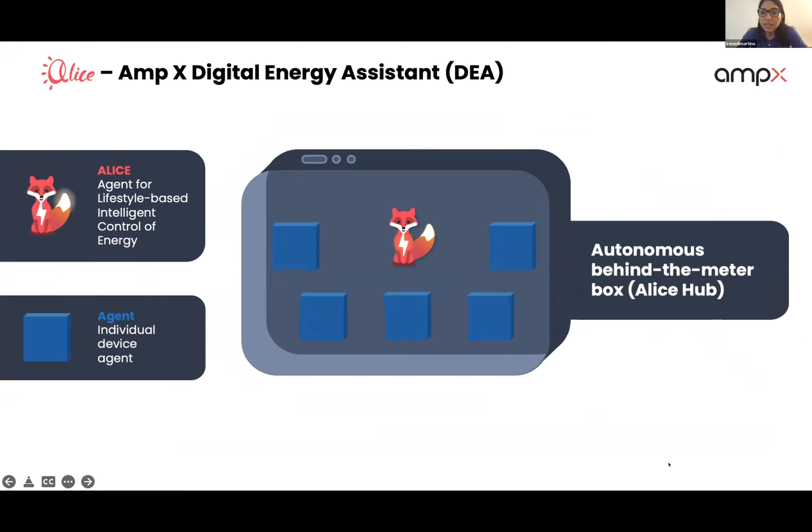So we have developed a digital energy assistant that we've named Alice. Alice stands for Agent for Lifestyle-Based Intelligent Control of Energy. What it does is essentially behind-the-meter mapping of all the different nodes responsible for either generation or consumption. Once it's done that, it starts engaging with the user.

It does that with the aim of learning about the preferences and behaviors of the users, so that through machine learning algorithms it's then able to not only take account of user preferences, but adjust those and intervene with awareness of what goes on in the grid. Because it does take price signals and carbon intensity signals into account.

This means there's the possibility not only to adhere to dynamic tariffs, in the case of a user just wanting to make the most of tariffs that allow them to reduce their energy bills, but most importantly, to adhere to demand response requirements so that there is demand-side management at a large scale.

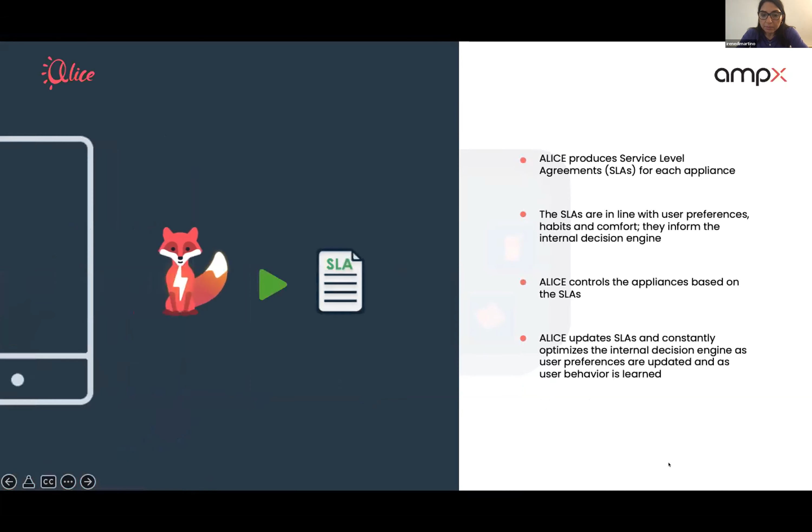So what Alice then does is stipulate essentially optimal scheduling for different nodes. And as I said, it does so by accounting for user preferences, and the user can always override if ever there's a need for them to take back control of a specific appliance or node, and remove that node from an otherwise scheduled task.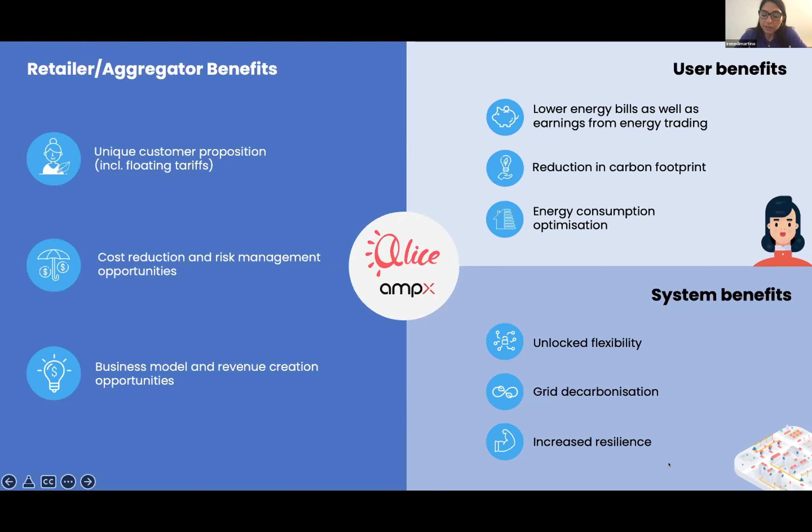I'm just going to show you briefly—we have developed a user interface because we have deployed this technology within the Energy Systems Catapult Living Lab for a period of 6 months. It's only just come to an end a couple of months ago. And as I said, the aim was to integrate with different types of devices and appliances.

So the user interface, as you can see, shows the user what's happening from each node's point of view in terms of total consumption or total generation, what the impact of that node is on overall cost for a certain period, or even a breakdown day by day throughout a week.

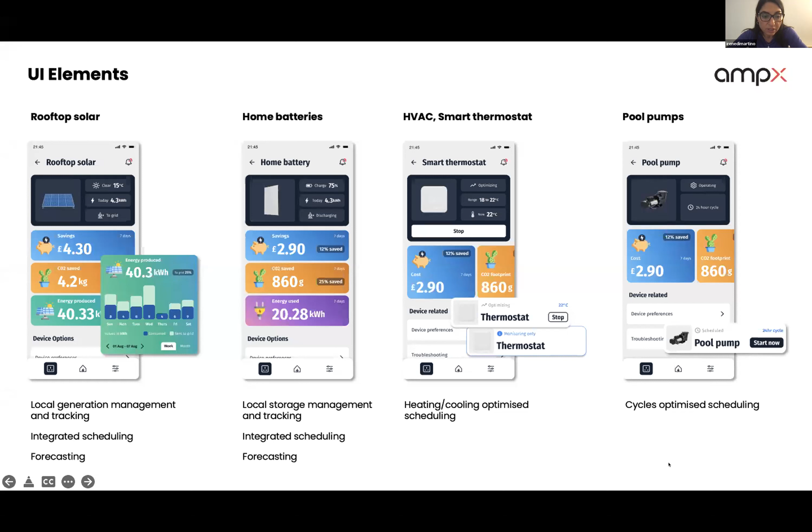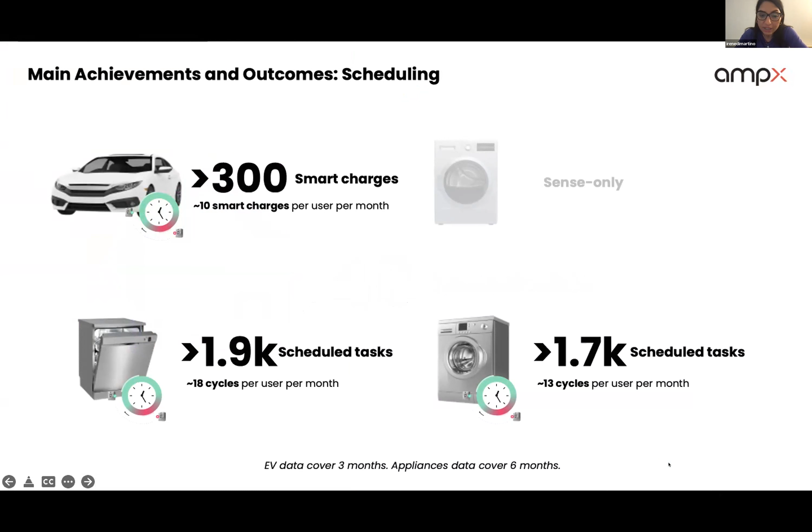I just wanted to give you a sense of what we gathered for the Living Lab deployment. We managed to schedule a number of tasks, not only around smart charging, but interestingly around appliances. One may think, how is the user going to react to having a technology aid scheduling things like washing machine and dishwasher? Actually it was surprising to see the level of delegation and trust, because that user-centric approach allows trust to be gained by ALICE and optimal scheduling to happen.

We were actually quite successful in simulating demand response, both at a very short notice period of up to an hour or less, and a longer notice period of 12 to 16 hours. For the 12 to 16 hour window, we had almost the entire cohort delegating and allowing us to shape the load.

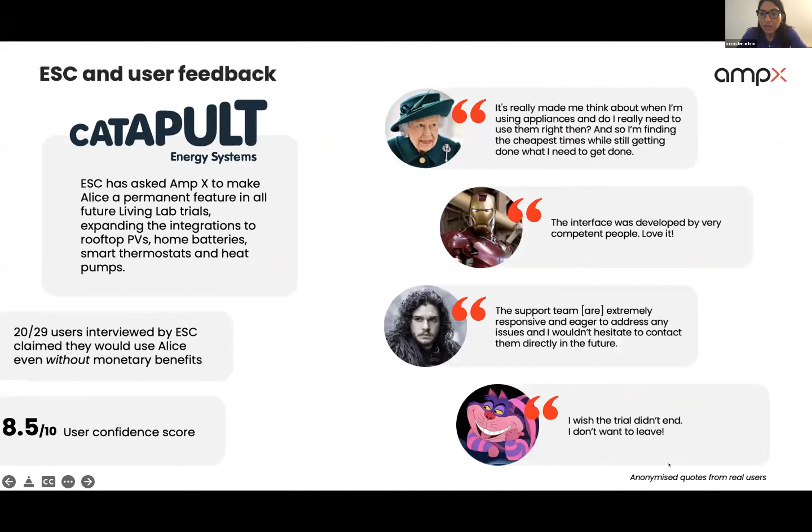The savings were very interesting too, to the point that when we came to the end of the deployment, users actually did not want to relinquish ALICE back to Amp X. They wanted ALICE to be left in their homes. That was, I guess, one of the biggest indicators that we managed to successfully implement this user-centric approach and get users completely comfortable having technology that determines how their node can play a role in grid edge flexibility.

I think that's me at this stage, giving you hopefully a good overview of what ALICE can do and how that intervenes into the topic of home energy management systems that we're discussing today. Thank you.

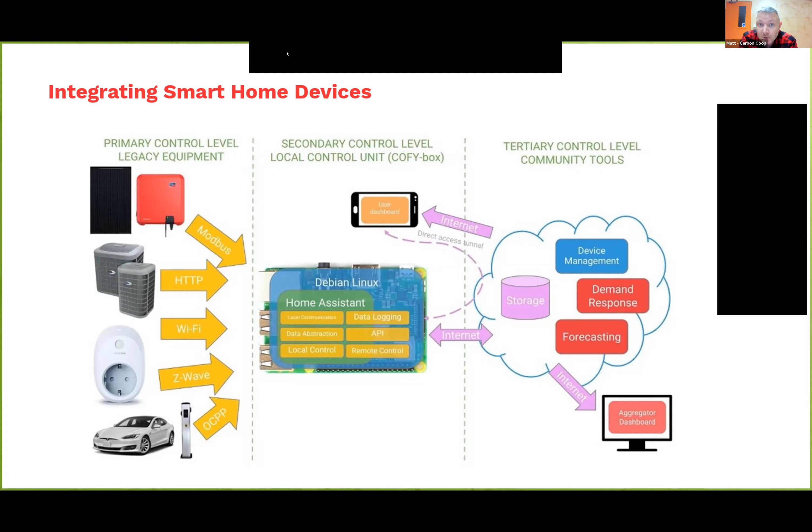The reason we're doing that is because, as has been mentioned by a couple of the previous speakers, there is a need for us to respond as consumers to help the grid decarbonize - to soften those peaks and fill those troughs in renewable energy generation.

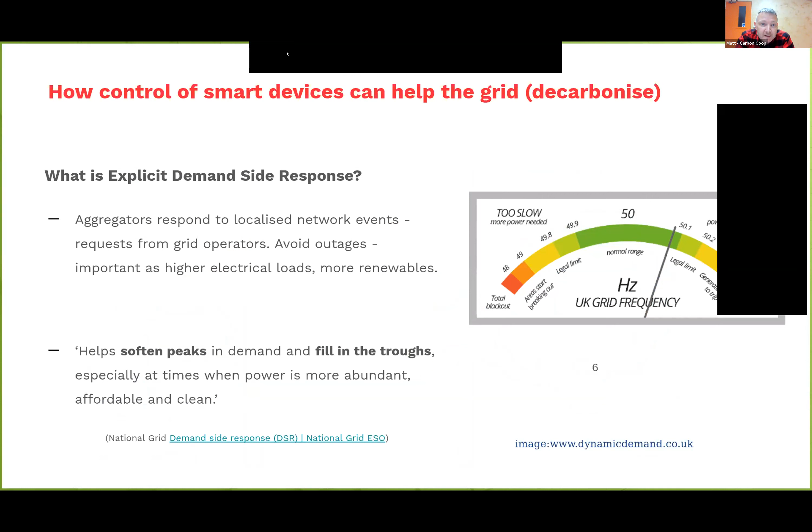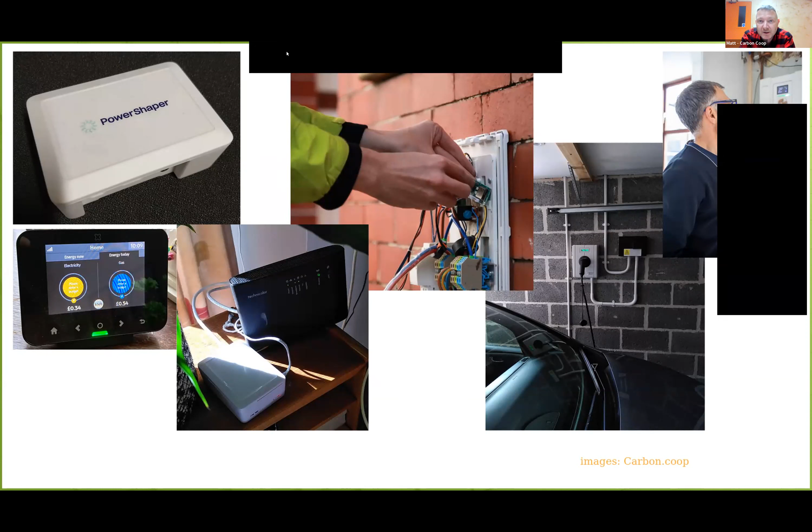So this is the little box. It is, as I think many things are, hidden around the home. It's a Raspberry Pi device, which is a local server in the home, which manages the various different smart home energy devices that we're able to control.

Just as it's a Cleantech meetup, I thought I would share our full stack there. So the important thing for us, and I think one of the real key features of the future of smart home devices, is that we've integrated, for example, the Zappi car chargers, and they're great. They work really well, but we had to do that by using a hack that someone had done of their control API.

So what we're really interested in here is open control standards. So that's things like OCPP, which is the Open Charge Point Protocol, I think, for Peter's benefit, for EV charge control. And that means that we can write a single control script and apply that to a range of different vehicles and charge points. So that's really a way of shortcutting a lot of the complex tech work. And it also means that we're assured that in the case of a change within that control regime or within that API, we know it's been tested to work with that open standard.

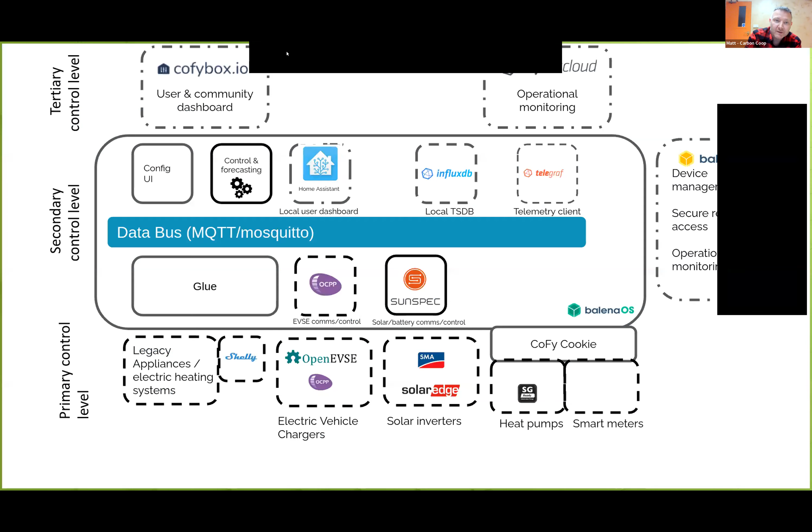So the element here, this local user dashboard, so that's our HEMS device, and we use a piece of software called Home Assistant, which will run on pretty much any computer. We happen to run it on a Raspberry Pi, and it's one of the 10 most active open source projects in the world, and it's the only one of those 10 that is community driven. So it's not driven by Amazon or Google or any of the big players. It's a community effort, and it has hundreds and hundreds of integrations. So different smart devices you can control, from Philips Hue bulbs to Tesla Powerwalls.

And it provides you with local control of your data, which we also think is particularly important as we move into an era where your data becomes a product in itself. So it's platform and vendor agnostic. So in many ways, it sounds like the dream that James was talking about earlier of something which is mass market and will deal with everything. But sadly, that's just not the reality at the moment. So it's incredibly flexible. You can design your own beautiful dashboards, but it's also very complex. So at the moment, it's really not a mass market product. It's for early adopters, for tech enthusiasts. And while that is something they're working on, there is, I think, a role for third parties to try and take out some of the heavy lifting there.

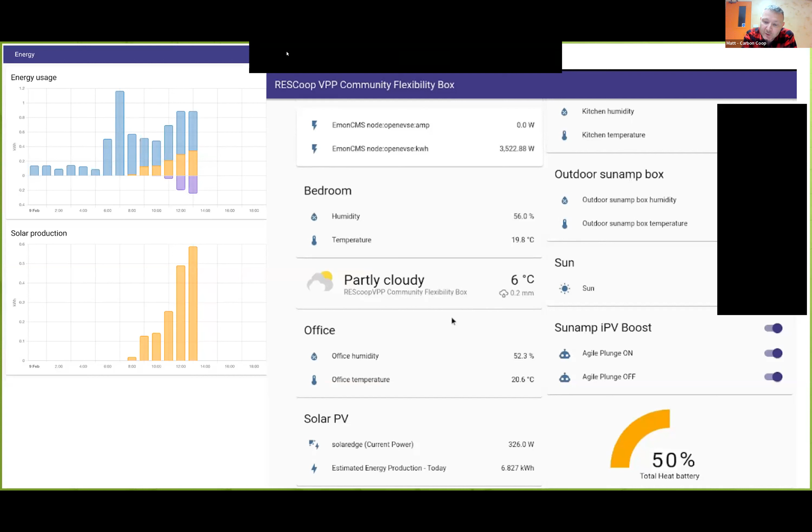So just to finish off, I think there are some things which are very important when you're thinking about your home network. And the first of those really is, does the device that you're going to purchase allow local control, or is control only possible via a third-party server? So we've seen countless cases, be it Wink or Insteon, of people who've invested significant amounts in devices around their home, and then the company simply turns the server off. Be that because they change direction as an organization, like iHome did, or it could be that the company goes out of business. And when we're looking at fairly significant investments, so things like heat pumps or EV chargers, it's important to be reassured that we're always going to have control of that down the line.

So does it have an open and well-documented API? So again, this is a question of control, really. So how are you going to be able to integrate that? So in the case of Insteon recently, someone hacked their API backend and was able to allow people to once again control those devices via Home Assistant. But that's really not the future that we want to be looking at. If we're going to make the sort of changes which we need to make in the energy system, then we're going to need a much higher level of integration across all services and appliances. And that's going to need to be cross manufacturer.